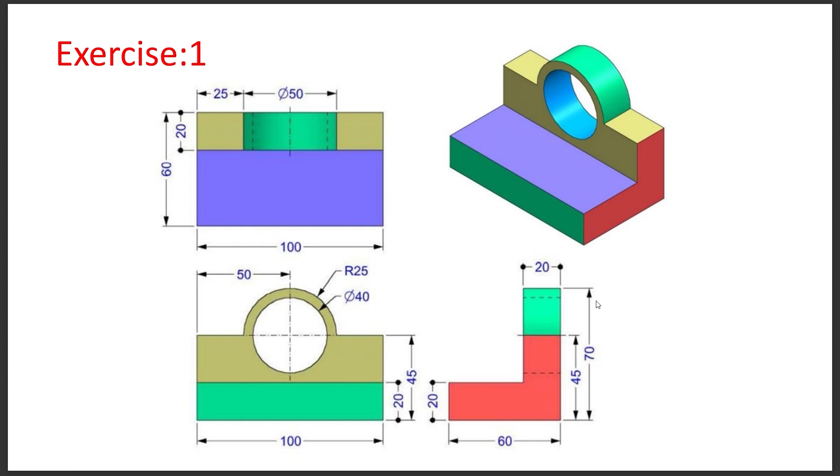So without wasting time, let us start modeling using Autodesk Fusion 360. First of all, we'll start a new design.

It will be started from here, and we are saving this one by the name of Exercise 1. We can save it to a specific location. We have created a folder by the name of Fusion, and we'll save everything there itself. Let us save it in Fusion, named Exercise 1.

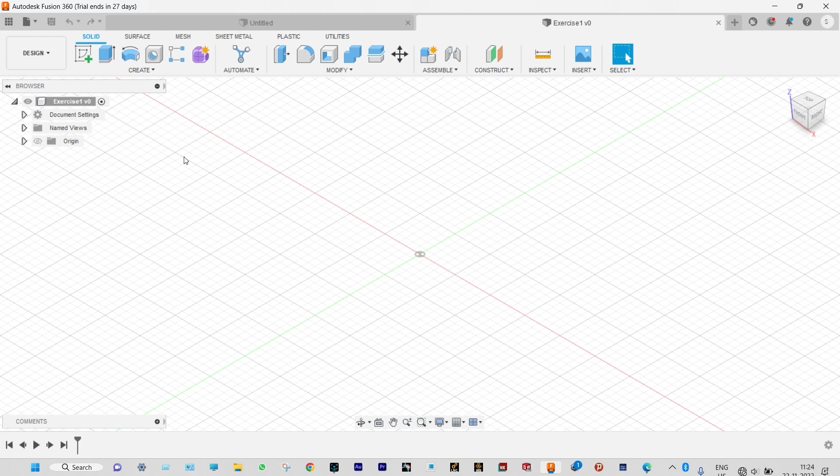Let us save it. First of all we need to start sketching. It will be started from here, and as we have started sketching we need to select a specific plane. As I told before, we can start modeling from any specific plane, but in this case it will be better to start from the right plane.

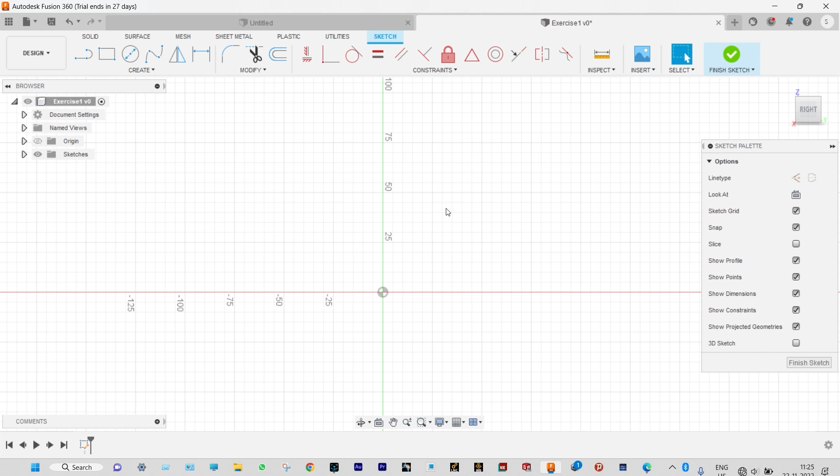Select it. Now, as I told before, we need to draw one L-shaped object. We can start it from line. Initially, without any dimension, we'll make the object. Later on we can provide specific dimensions as per requirement.

Drawing is complete. Now we can provide specific dimensions using this dimensioning tool. Height of this one is actually... let us see the drawing again. Height of this one should be 70 and width will be 60 millimeters.

We know that we have already started drawing with the unit of millimeter. We can check it from here itself that the unit is in millimeter, so no need of changing this one. Okay, and this dimension will be 70 millimeters.

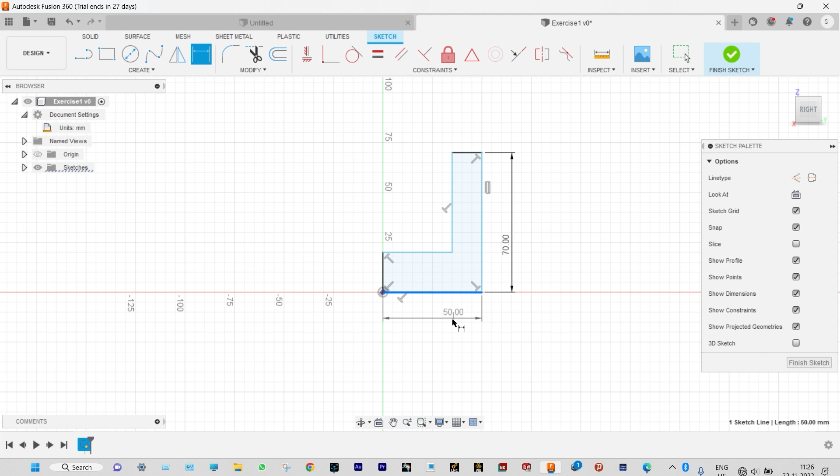We can write it now. It is 70 millimeters, and width will be 60 millimeters. We can put this one as 60. Enter, and this one will be 20 millimeters. Done. And again this one also 20 millimeters. Done.

Our sketch is complete, and it is showing that all the colors of this sketch are actually black. That means all the constraints are satisfied. It is a complete sketch.

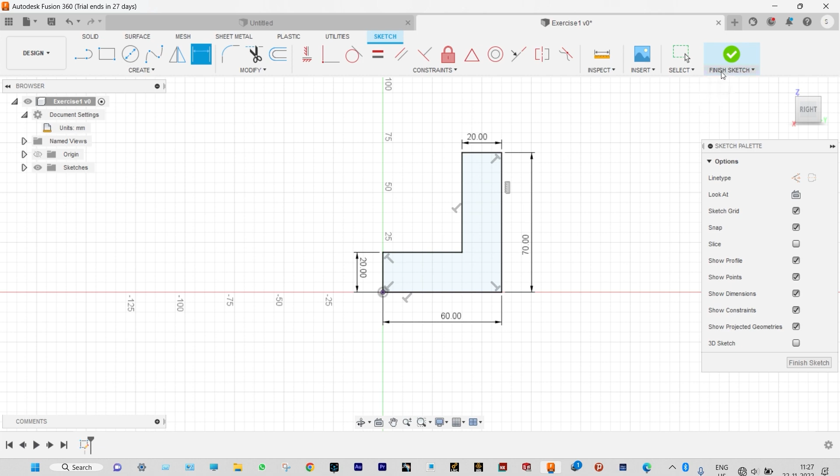So we can finish sketch and put a specific extrusion depth, started from here. Extrude. While providing extrusion, we can extrude this in a specific direction or both directions. As it is a symmetric object, we can select symmetric direction, and the depth of extrusion is actually 100 millimeters, so both ways it will be 50-50. We can provide the depth of extrusion as 50 millimeters.

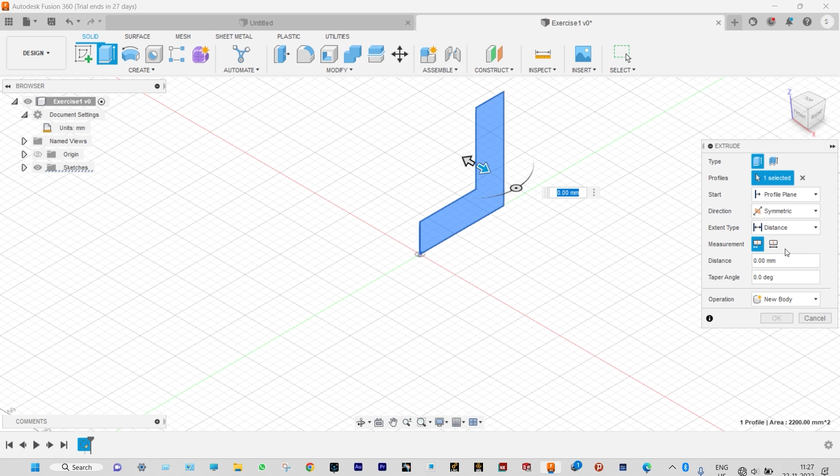It is done. Now in this case, we have to create one semicircle of diameter 50 millimeter. Let us check that. Here we need to provide a radius of 25 millimeter.

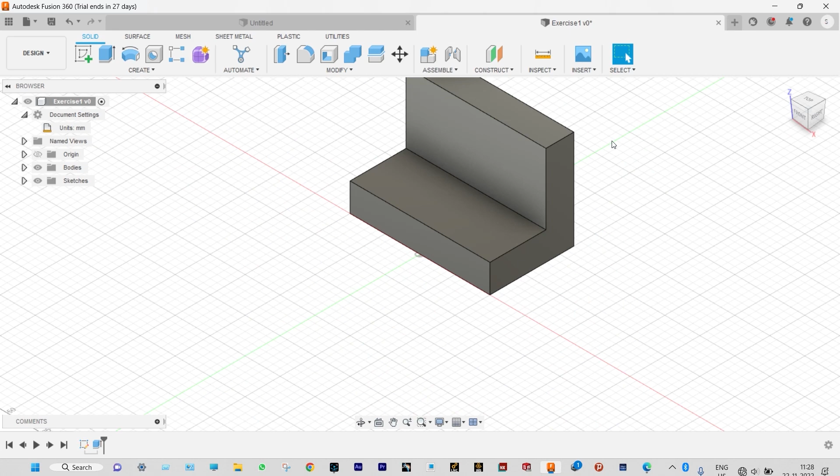We can select the specific face of a surface and start creating one circle on that surface. At this location we need to provide one circle. Sketch circle, we can create from the midpoint, and let us provide smart dimension to this one. It will be diameter 50 millimeter. Done.

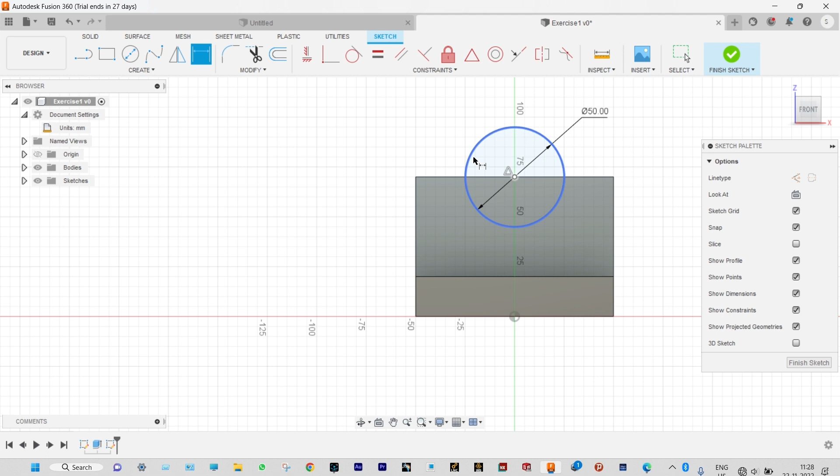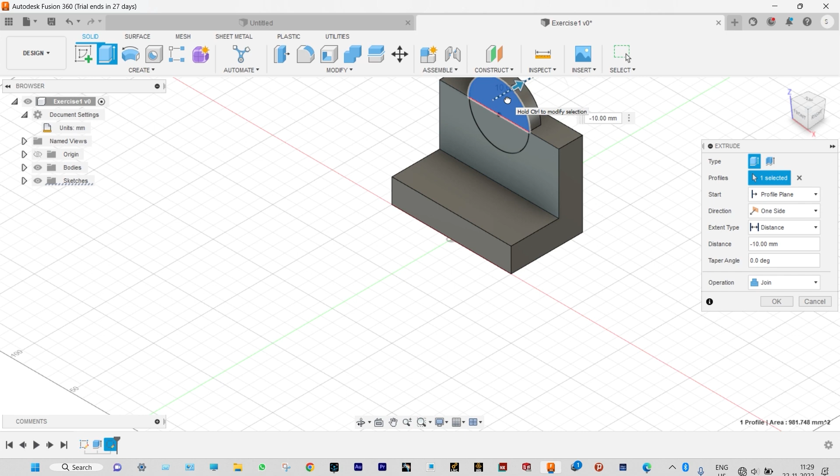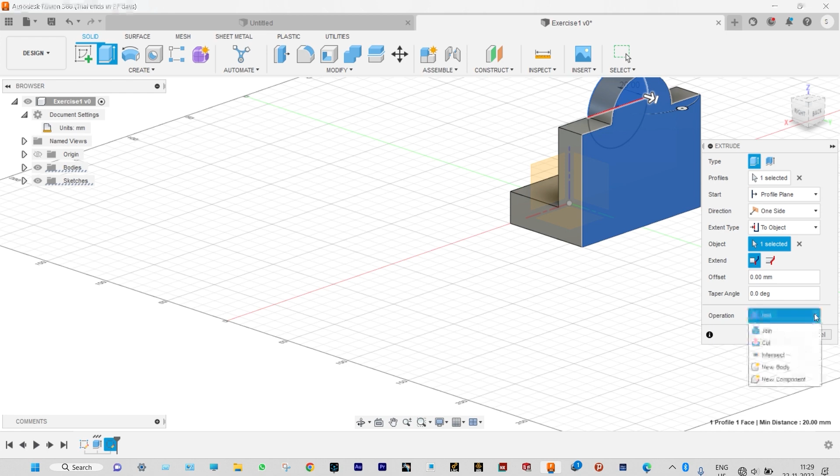Now we need to extrude this top side. As the drawing is complete, let us finish sketch, and extrude this one. For extrusion, you can start from here. This should be extruded in the opposite direction, so reverse the direction by changing the arrow, and for distance select 'to object' since the object will be at the back side. Select the specific location up to this one, and the operation will be by joining this one.

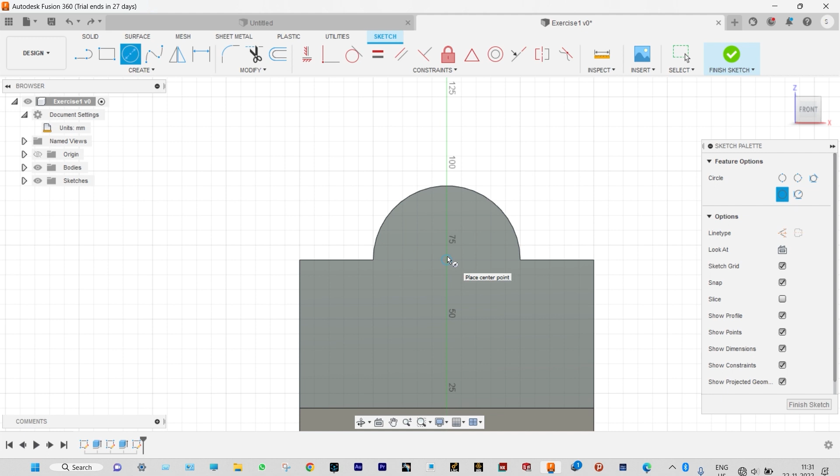Done. Now another thing to be done here: at this location you need to provide another circle. So select that specific surface and start sketching on it. We need to provide a circle at this location, starting from circle, and this circle should be concentric with the previous circle, with diameter 40 millimeter. Done, and you can check the dimension of this one, it will be 40.

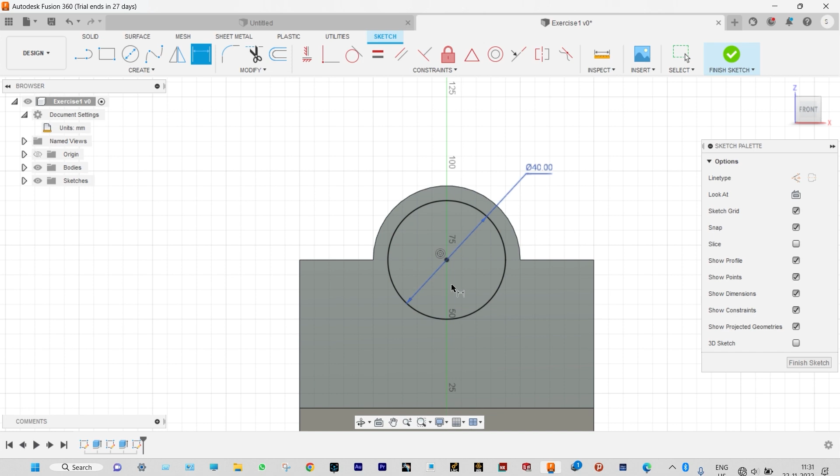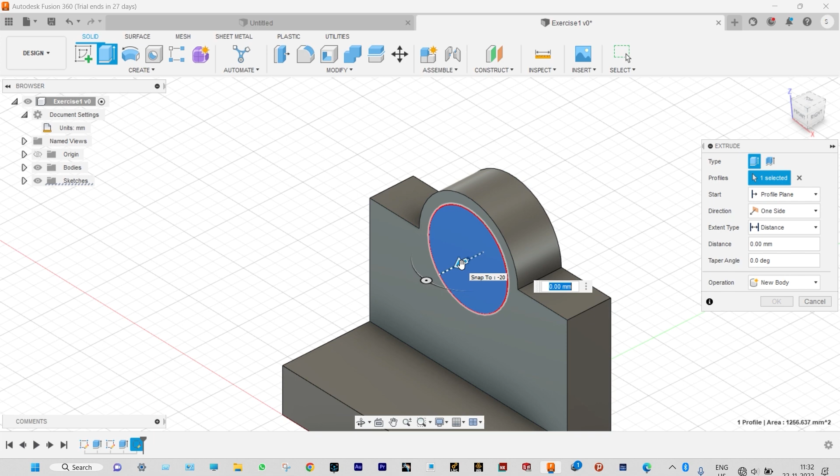Complete, done. Now we cut from this specific material; this circular portion should be subtracted. We can rotate this object, and that area should be subtracted. Finish sketch, and we need to subtract this material from the object, opposite of the extrusion direction. Selecting extrude, the direction will be opposite, cutting backward with a depth of minus 20 millimeter, or we can make it 'through all'. Done, complete.

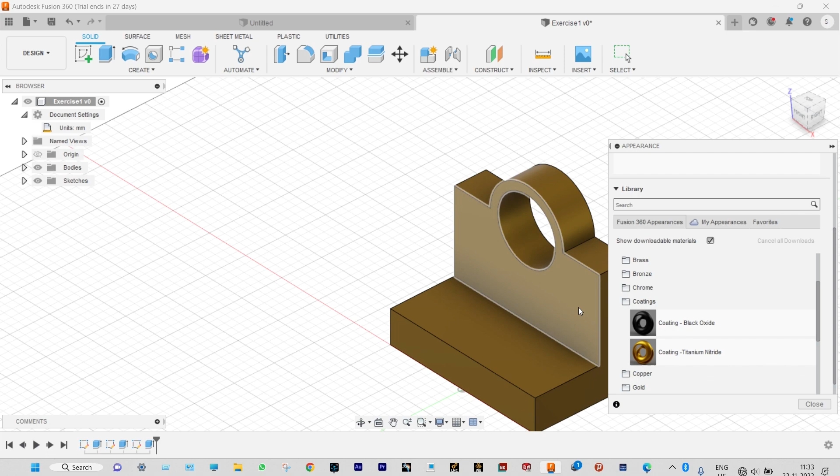Our model is ready. Now, to provide a specific color to this object, we can select appearance, using shortcut A. We have selected appearance. From the drop down menu you can select the appearance to be made of metal, and let us select coatings. It will be made up of titanium nitride. Let us select that one, close it, done.

So this is our first model, you can see it, right?

Initially we started this object from this side. We made a sketch from this side, and this sketch was extruded with a depth of 100 millimeter. Next, we selected this surface, and on that surface we provided one semicircular object of diameter 50 millimeter that was extruded up to that surface. Finally, we provided another concentric circle at this location with a diameter of 40 millimeter, and that specific circular portion was subtracted using the extrusion command, in the opposite direction of the forward extrusion, so the material was removed from this surface.

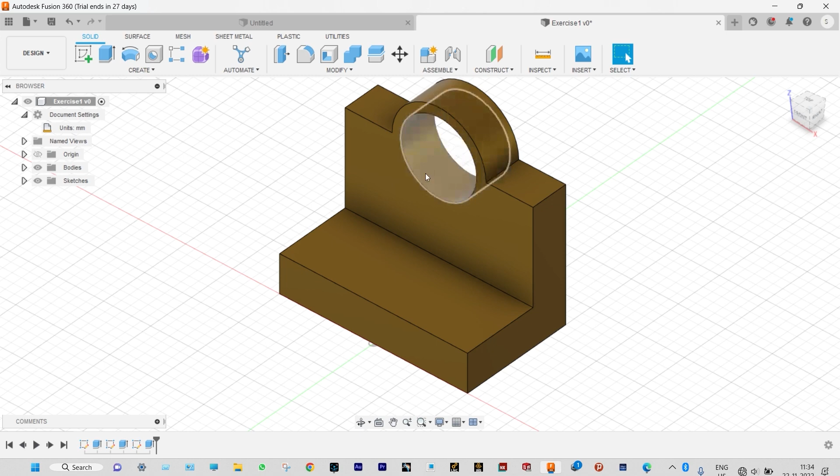Okay, this is all about the first modeling. This is a very simple one. We can model this within 1 minute.